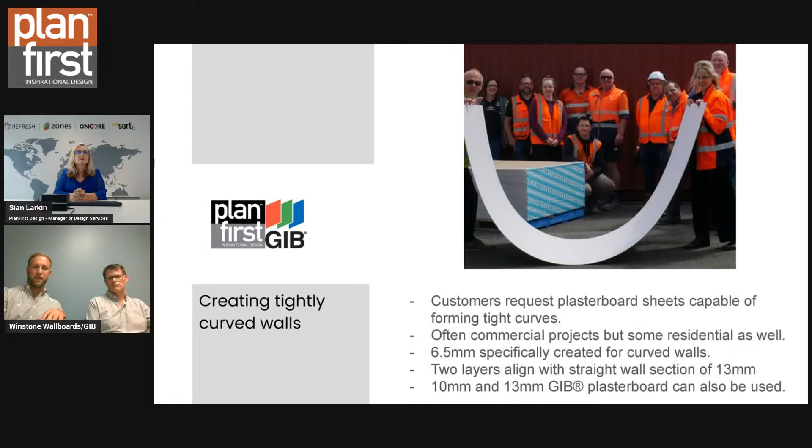So when we look into buildability, one of the key things to remember is that we've actually got 4 videos, I think, online on how this product actually gets installed, done by one of Richard's colleagues, Doug. Quite a video, if you've got, I don't know, half an hour. They're very short videos, yeah. Yeah, I think maybe half an hour in total.

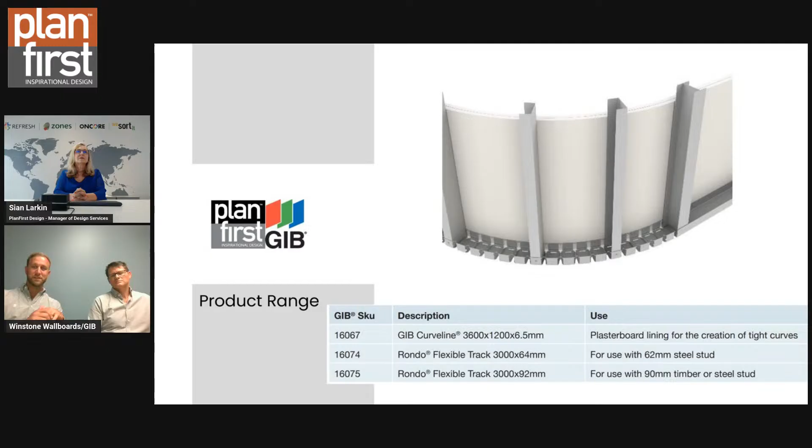It's a great way to look at how the product gets installed and the care as to what goes into getting a nice curve on your wall. So you can see here we recommend the use of a flexible metal track. We absolutely recommend there the use of metal studs. The least amount of movement in behind that curved wall is going to be preferable. You don't want any stopping out at all. It's just a rough idea of how the product actually looks.

To get down to the specifications of what this product can do, you can see there a double layer system. On the concave, your minimum radius that you can get down to is 450 dry and 250 wet with the convex. So when we fix that vertically, we go into a convex curve, we can get it as tight as 250, and there have been some images actually tighter than that. I think one of the first installations was actually tighter than that.

Yeah. One of the first jobs that it was installed in was a dental clinic or hearing clinic. Can't remember which one it was now. The hearing clinic, and they used it on an external curve just around the corner, and it was probably about a 150 curve. But we don't state that because we're not confident that can always be done. But he was a very skilled applicator, and he was very confident, and he managed to achieve it. It came out really well.

Yeah. And so one of the key things to remember when you're looking at the Curveline product range is it is going to highlight any flaws or improper installation. So you're really going to want to aim for that level 5 finish. You're going to want to avoid too much critical light, so you don't necessarily want too many wall lights shining down and things like that. It is going to show up any tiny little imperfections. So a really good level of finish, and you want a nice paint job put onto that as well.

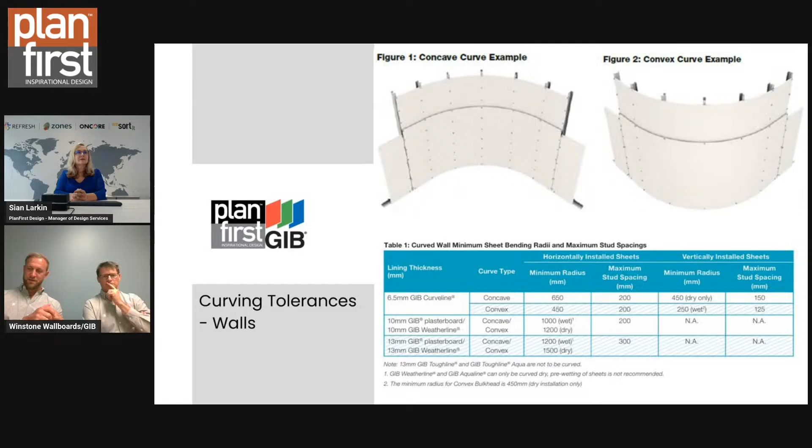Now you put this one in here, and it's really important to remember. I'll throw it to you in a second, but yeah, we don't recommend Curveline to be used in the ceiling space. If you did want to have a curve into the ceiling space, we do recommend the 10 and 13 mil plasterboard. And it's important, as Richard's written there, that we do not recommend curved ceilings in ceiling diaphragms. Did you want to speak to the configurations?

Yeah, so we got a few queries when we first introduced it about being able to create small bulkheads at your wall ceiling junction. And so we've provided a bit of guidance now on that, and you can actually do that, you've just got to make sure there's enough framing in there, and you still are fixing that to that framing at 200 centres. So when you've got either a concave or convex bulkhead, you might be trying to conceal some services, but it can be achieved. You just can't carry it on into the horizontal ceiling plane.

So one of the things we've got written down here, currently the GIB Curveline isn't part of any sort of fire-rated system, but under the ISO 5660, it does achieve a 1S classification, which broadly, and you can jump in here if you want, Rich, means it's a very low risk to contribute to any fire or smoke emissions at all. So the use of it in a lot of applications is going to be quite positive there. From a design point of view, did you want to talk about bracing quickly, actually?

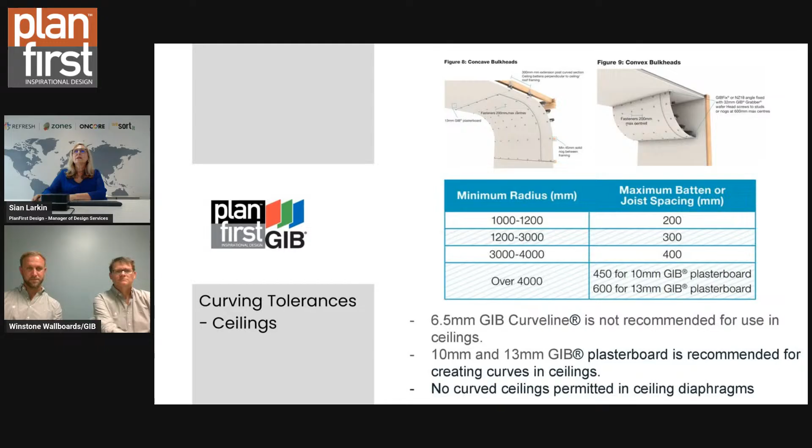Yes, one of the questions that I do see here before we go into the acoustics is, how does a curved wall affect sound in my living room? Did you want to jump in? You go ahead. So depending on how the curved wall is actually done, a convex curved wall will dissipate the sound, whereas with a concave one you can capture that sound into a sort of hot spot. A focal point. A bit of a focal point. So if you're using a convex curved wall, depending on the radius, you will dissipate that sound slightly. There's a few variabilities in there, and you've always got to keep that in mind.

The overall combination of a curved wall with an acoustic board, like a Braceline or Noiseline, has been used to great effect across the building industry more recently. And so we can see those two work quite well to reduce and dissipate the sound in your living spaces. And you guys will be able to give advice on that before the installation is done? Yeah, we can talk to it, absolutely. We're not necessarily writing it out and testing every possible permutation, because there's so many variations. And we aren't acoustic engineers also. That's a big course.

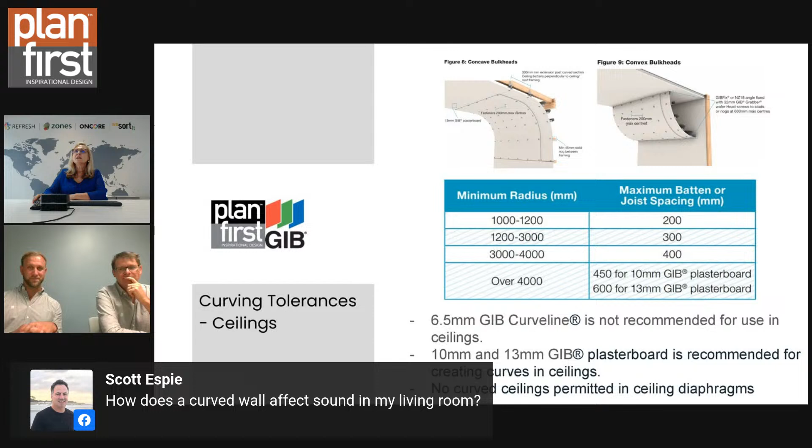Okay. And then will Curveline improve the resale value of the home? Yeah, so that one again is somewhat subjective. If you are selling into the higher end of markets, and you've got a decent real estate agent who can point to it, absolutely. Yeah, it's very much a luxury feature. It adds a bit of a wow factor as soon as you walk in. But some people might not like it. Some people might like the minimalistic, sharp edges and older, different styles of design. So it's somewhat subjective. I wouldn't say it would hurt any resale value, but it definitely can boost some resale values.

I actually went to a seminar a few months ago where a Chinese person was talking about the feng shui of a house and how they try and exclude the sharp corners. And we actually introduced them to the Curveline, and they were very excited about that. So having curves and curved corners is actually good feng shui for your house. That's true.

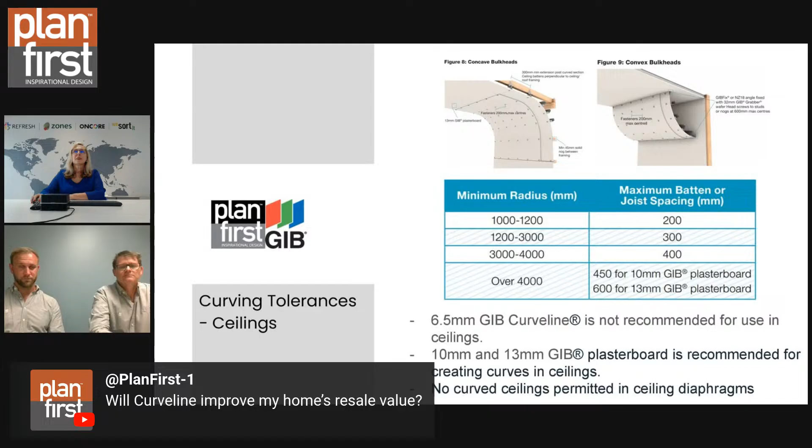Will it cost a lot more than regular walls? A definition of a lot would be subjective again. Look, it is going to cost a bit more. There's a bit more finicky stuff in there. So you've got your base plate that would need to be formed, whether you use the metal track or some plywood to form the base plate. That will take a little bit longer than a traditional framing system. The actual plasterboard itself isn't too much more expensive than your standard board, but the installation, plastering and finishing will be a little bit longer. So your labour time is going to go up.

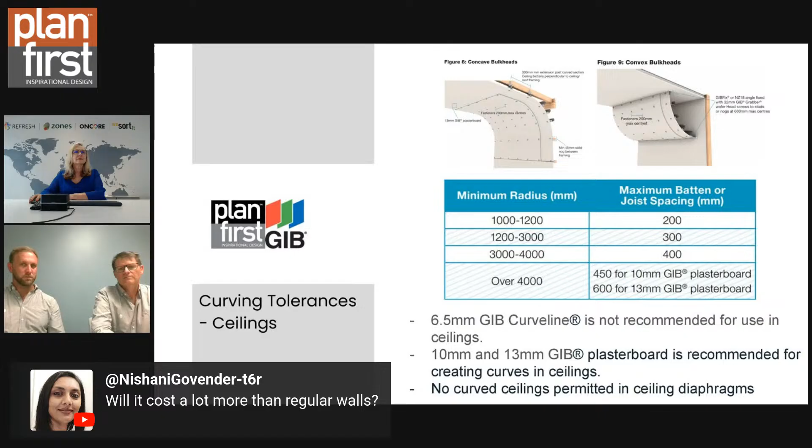If your curved wall can be done with 10 or 13 mil plasterboard because it's a more gentle curve, you would use that because that is a cheaper board. The 6.5 mil Curveline, when it's manufactured, slows the actual line down, and we do it in smaller runs as well, so that does increase the cost of it. So as long as you use it here and there for features, it's not going to make an overall real difference. And if you can design it in a way that you can use a 10 mil, do so; the Curveline is for those tighter options. It's formulated specifically for those tighter options. And can you retrofit it? Yes.

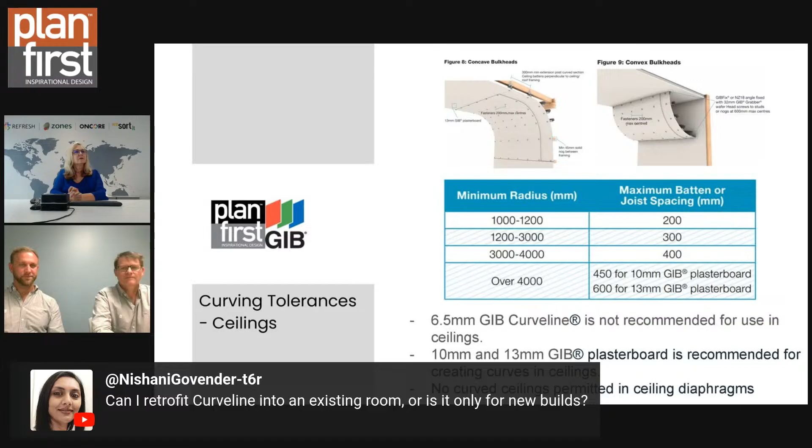So for noise control, the basic principles are fourfold, and you need to have all four to get good noise control from a wall. First, you need structural separation of your linings or frames, and that can be done by either a double timber frame, or where you've got a single timber frame, you need a resilient rail or resilient mount to help separate that lining from the frame.

Then you need insulation, and that's your kind of fluffy stuff that fills the cavity. That helps trap the air and stops airborne noise from going through, and that's critical for the high frequency noise. Then you need mass, and with our systems, that mass is provided with the plasterboard wall linings, and our GIB Noiseline and Braceline is the wall lining with the higher density, and that's why we specify that in most of our noise control systems.

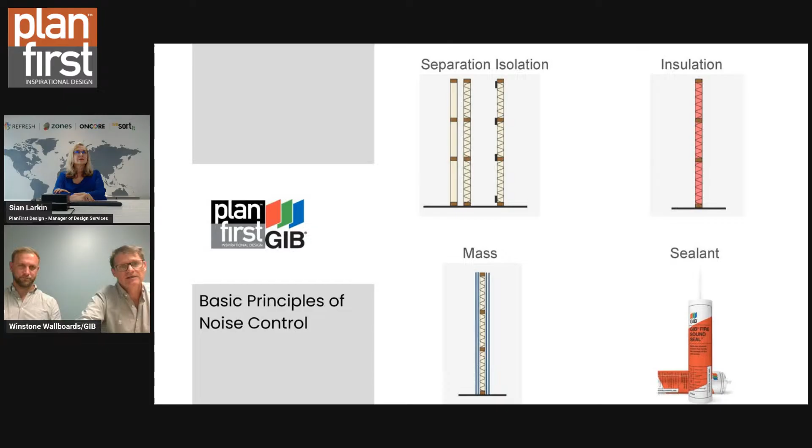So I'm just going to go through our three basic wall system offers. First one is what I deem a good system in that it actually meets New Zealand Building Code G6 requirements of 55 STC. And this is a single frame system. This is often popular because it is the most cost effective and also has the smallest footprint, being a single frame. But there are some limitations to this system, which means it's actually not always the best system to specify on a project.

It has a GIB rail or resilient mount on one side. Because of that, the lining on that side can't be used for bracing, and it also can't have tiling over that lining because those rails or mounts are not designed for the extra load. Also, if there's penetrations for power points, etc., you can't really have the penetration on that rail side because any penetrations going through that lining are going to connect it back to that frame again, and you're going to lose that isolation. That's that leak you're talking about before. Yeah, flanking going through.

Also for a two-story designed house with a single frame, you will have a real issue of actually resolving that flanking at that junction of the mid-floor to the other adjacent unit. So yes, you can have the single frame system, but you've got to really think through the limitations that you have on site and whether it's the best option.

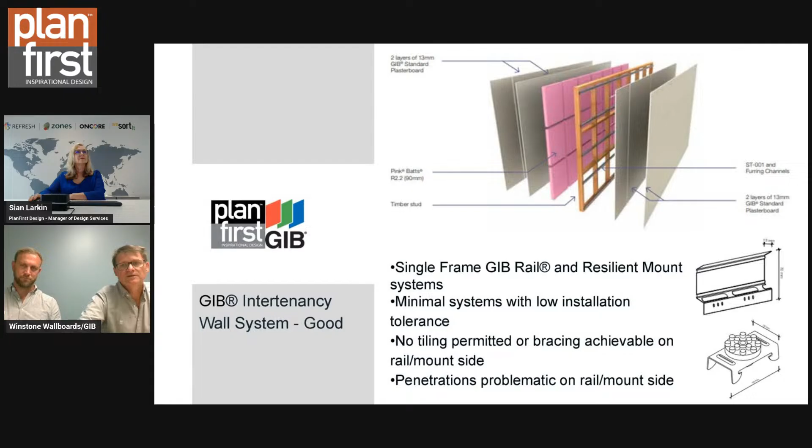The better system is our double frame noise control systems. These are more robust, and you achieve that acoustic isolation by a minimum 25mm gap between the frames. That is a minimum. You can have greater gaps between the frames, not a problem. We do have solutions for flush box penetrations on either side in our manual. Also, if there is lateral stability required, we do have the GIB Quiet Ties to help with that.

And as with the previous one, this one and the next one I'm going to talk to you about, all noise emitting devices should always be mounted away from IT walls. If you have your TV, your heat pump, your kitchen appliances, your bathroom appliances mounted against that wall, that's going to radiate through and affect the neighbouring unit. So you've always got to be mindful of your layout when you specify your IT walls.

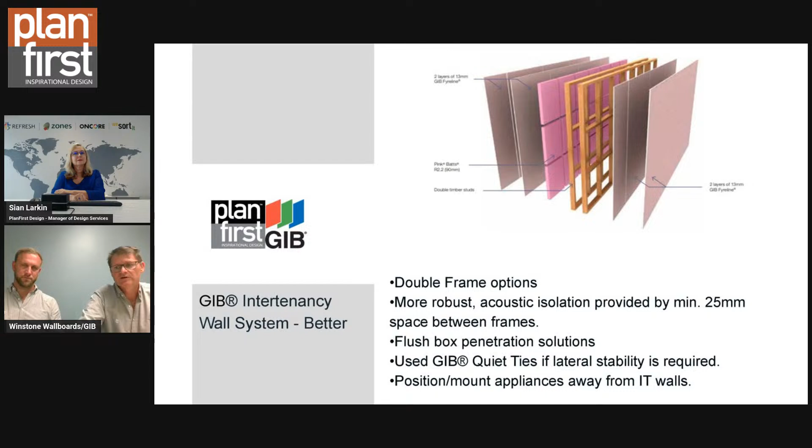And then our best system is our GIB Barrierline system. So that's when you look at the manual, the GIB Intertenancy Barrier Systems for Terraced Homes. This is a 25mm plasterboard central barrier installed between two frames with a minimum 25mm gap set out from that frame to that barrier. It's designed as a vertical fire and noise separation, and it has very high fire and noise control performance, much higher than is required by the building code.

So we have 4 timber frame Barrierline systems and 2 steel frame Barrierline systems. All have a 60-minute fire rating, whereas usually it's only a 30-minute requirement, and a noise control performance of STC 61 to 68, where you need 55. It is actually relatively cost effective and has a narrow footprint when you compare it with other central barrier systems.

Importantly, it's also compatible with our GIB bracing systems. So when you're doing a row of terrace homes, you still actually have to individually brace each terrace home so that it can actually stand up on its own. By having this system, you actually do create 2 separate bracing lines, one each side of that barrier for each unit. It's just a single-sided brace, so you can have your BL1, your GS1, so fully compatible with the Easy

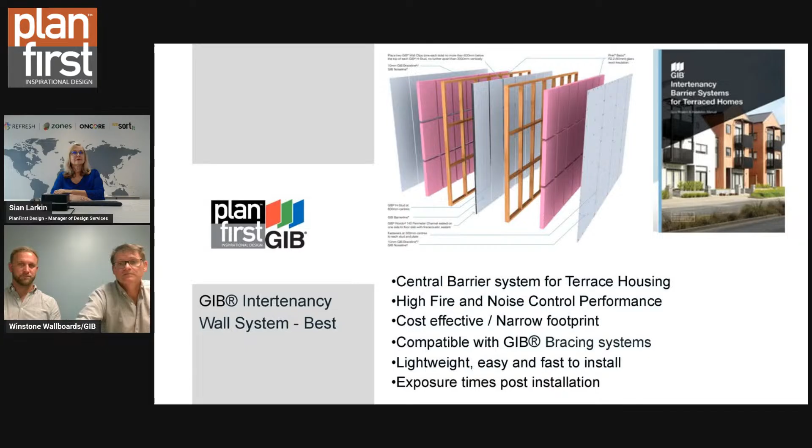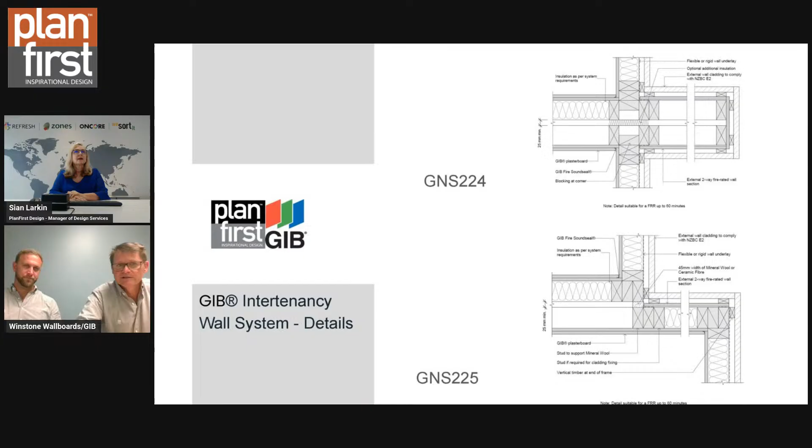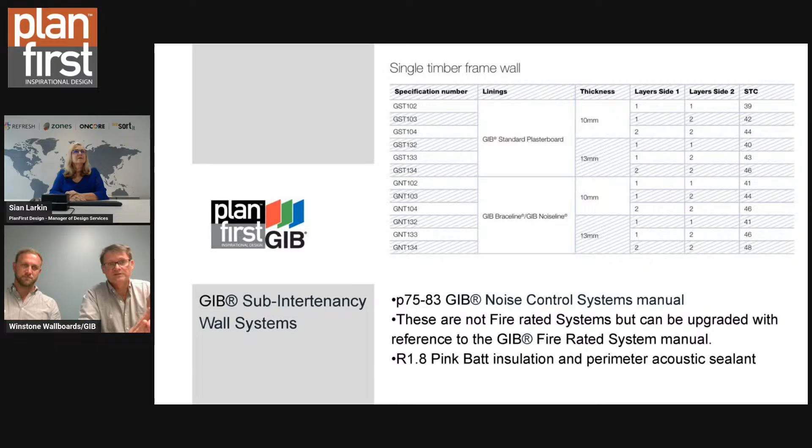What this does illustrate, though, is that, yes, we've got your mass or your linings, we've got your insulation, you've got your sealant around the perimeter. We don't have the isolation between the frames or linings and frames. And so it just shows you to actually achieve your G6 requirement of 55, you do need to have those 4 elements. We're missing one here, and that's why we've got that drop.

Substitutions. So we often get asked about substitutions for different products, and just like your sports team, you might sub on a player towards the end of the game, and is it going to perform the same, better or worse? You're not going to know until the end of the game. So that's the same with substitutions. They need to be tested to understand if it's going to have the same performance.

So our standard response to substitutions is that if alternative products are substituted into GIB systems, it is the responsibility of the user to ensure that the performance of the system is not compromised. We don't tend to have any testing for substitutions. We test our system that has our products or elements, and we've done our fire test or acoustic test, and we know exactly how it's going to perform. When you're putting in other products in there, we don't know.

With fire systems, they are not typically reliant on the insulation for performance. So generally speaking, you can put any insulation that you need for H1 purposes or other purposes in a fire rated system. It's not going to affect it. For noise control, though, it's different. We have done some testing for polyester sound control infill, and we currently have that little article in our noise control supplement, where we say for polyester sound control infill of a certain density and certain airflow resistivity, it will perform the same. But for other products, we haven't done the testing.

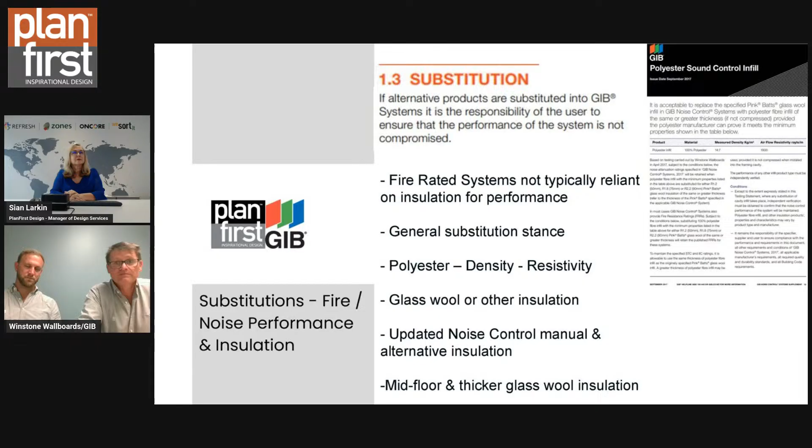Generally for mid-floor, we're at ease. If you're going to go for a thicker glass wool insulation than we state in our system, that's not going to negatively affect the system. But going back to the original thing, if you're looking at alternative products and systems, then you're going to need that support from the provider of that system, of that product. I think that's about it.

Oh, thanks very much, guys. That was very informative, and I think we can actually talk about both these topics for a lot longer than what we've got time for today. So we might dive into more detail in the future.